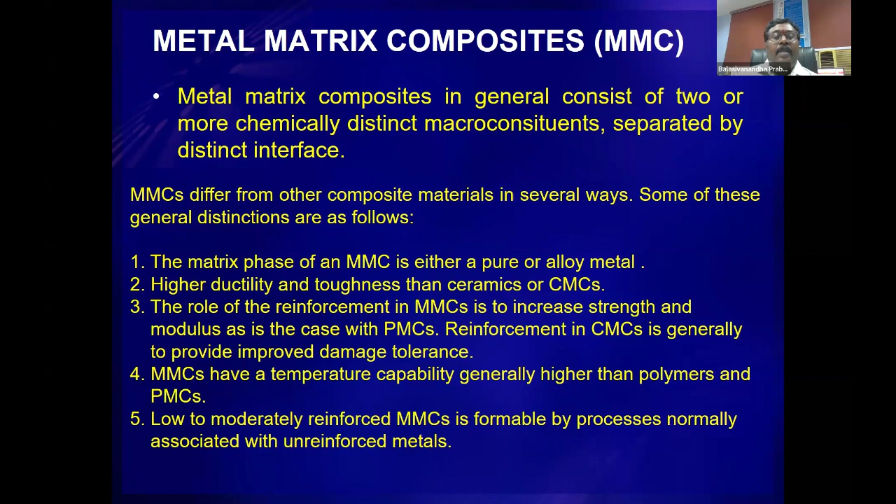Low to moderately reinforced MMCs are formable via processes normally associated with unreinforced metal, meaning all the conventional methodology used to process metal can also be adopted to manufacture or process metal matrix composites. As a result, the technologies are not new - it is only modifications of conventional technology that we employ, with some little changes needed to manufacture or process composites.

These are some basic things: metal matrix composites can be classified into dispersion strengthened, particulate strengthened, and fiber reinforced. The fiber reinforced would be similar to polymer matrix composites, where we have a lot of opportunity with respect to particle reinforced composites and dispersion strengthened composites. These are all distinguished only with respect to the particle dimension.

If the particle dimension is more than 1 micron, we call that particle reinforced. And if the particle dimension is less than 1 micron, we call that a dispersion strengthened MMC.

So the principle is very simple. In fiber reinforced composites, the fibers take up the strength, so that is the major load carrying member, and as a result the strengthening mechanism is the fiber strengthening mechanism. But in particle reinforced and dispersion strengthened composites, the particles act as a hindering element to dislocation movement, and as a result you get a good degree of improvement.

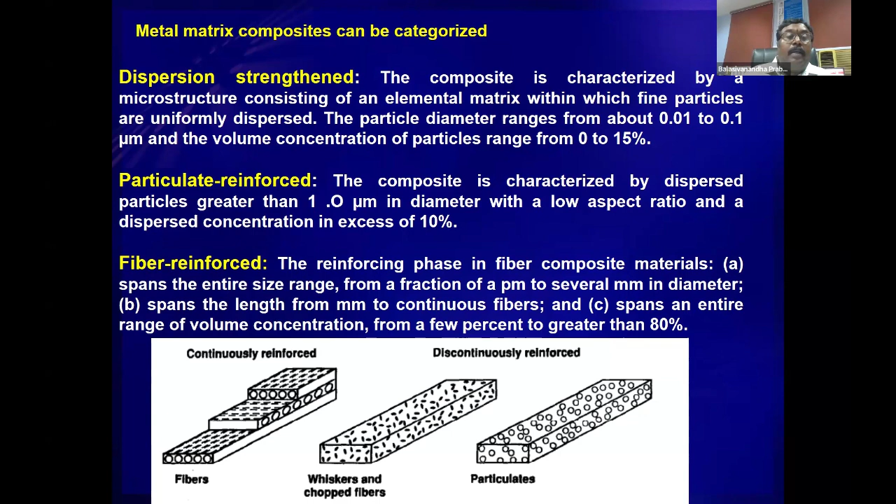So in general, we have aluminum, magnesium, titanium, copper alloys, and super alloys, and the majority of these metal matrix composites were already tried with aluminum and magnesium.

And we take this reinforcement, mostly silicon carbide, graphite, or alumina, in the form of a particle, fiber, or whisker.

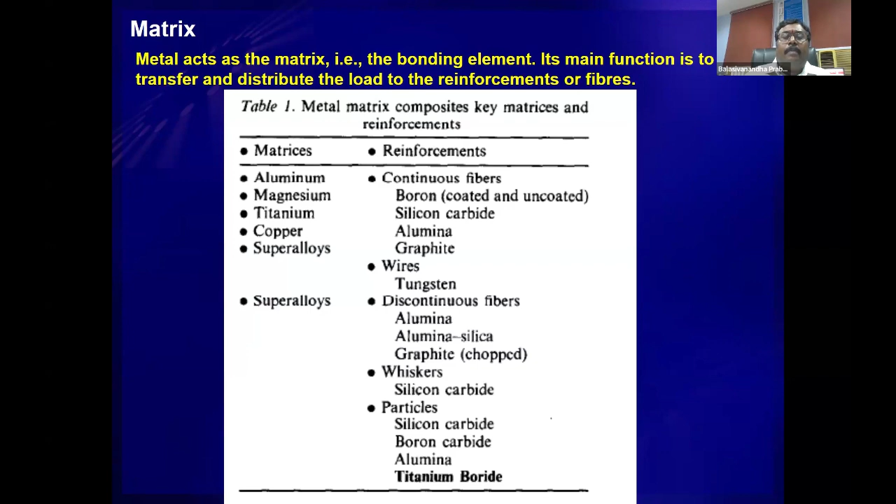Coming to the processing technology, if you want mass production, we depend on two technologies: solid state processing and liquid state processing. In vapor state processing, somehow you can make a batch production, and for high-end applications we still fabricate some MMCs with vapor state processing.

Solid state processing technique is also possible with the mass production concept, but because of size limitation and some inherent problems associated with this composite technology, it has not been fully used for commercializing metal matrix composites. But in the research field, we use solid state processing to demonstrate some mechanical properties of metal matrix composites.

So from an industrial perspective, liquid state processing would be the convenient method for mass production technology of metal matrix composites. Here we have three different stages: pre-processing, primary processing, and secondary processing.

This liquid state processing technology is especially useful for particle, short fiber, or chopped fiber, or probably for continuous fiber also in the case of preform preparation. The major technologies associated with liquid state processing are stir casting, infiltration, and spray casting technology.

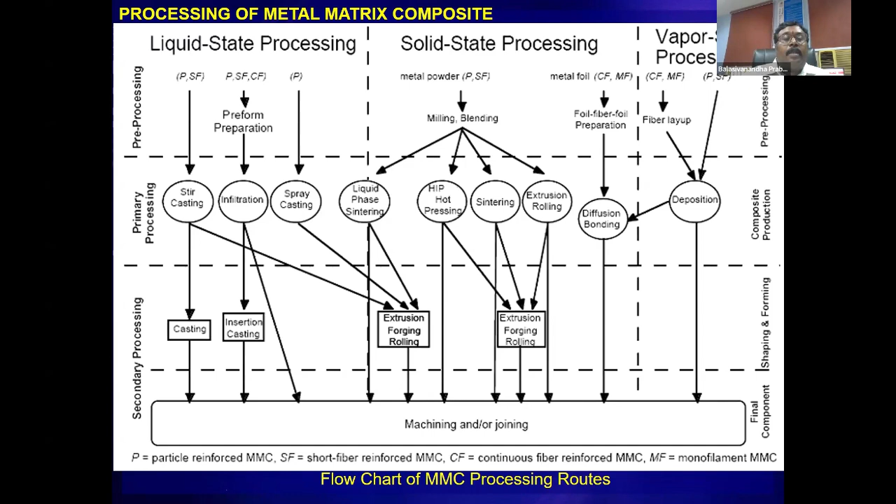Now what I am going to talk about is only liquid state processing, because that is the technology where, if you overcome its barriers, there is a possibility of mass production. So industry can think about making good composites in mass production and then use them for different applications.

So in stir casting with liquid state processing, we can have a metal yield of 90%, and the range of volume fraction of reinforcement addition is 0.3, that means 30% of reinforcement in terms of volume can be added. Also, no damage occurs to the reinforcement, and it is least expensive.

Associated technologies of liquid state processing include squeeze casting. In squeeze casting, we can go up to 45% volume fraction, that is 0.45 in fraction, 45 in percentage. But sometimes there are damages to the fiber or particle because pressure is applied, and it is moderately expensive. Powder metallurgy, compared to liquid metallurgy, is highly expensive.

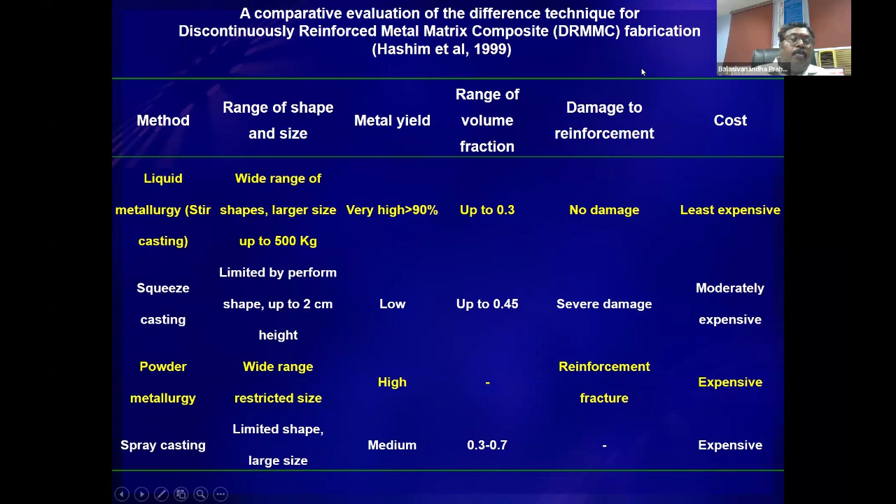So for commercial production and for mass production, it would be possible to take up the stir casting technology.

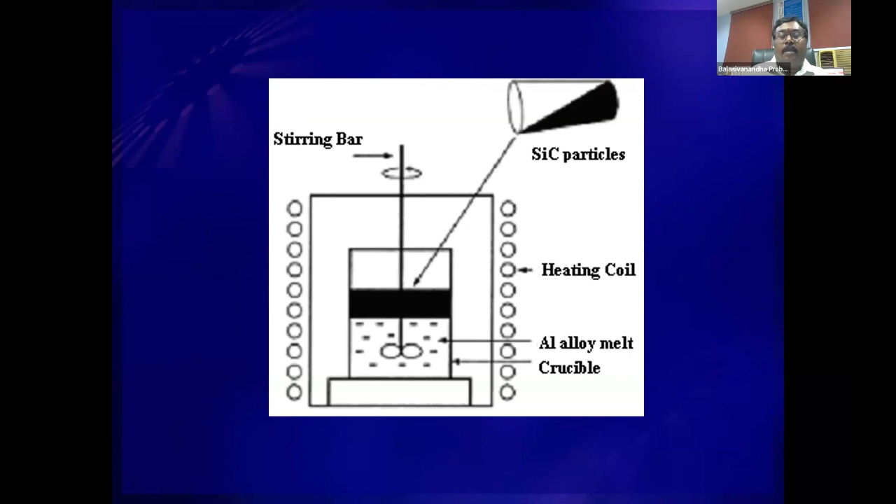The technology is very simple. You heat the metal to make it a liquid and superheat it, then add the reinforcement particles, whatever they may be—silicon carbide, alumina, or any other particle. You stir it mechanically or ultrasonically, creating turbulence so the particles homogeneously mix and distribute uniformly. Once distributed, you deposit it by conventional casting solidification. These are some microstructures we have cast in our laboratory.

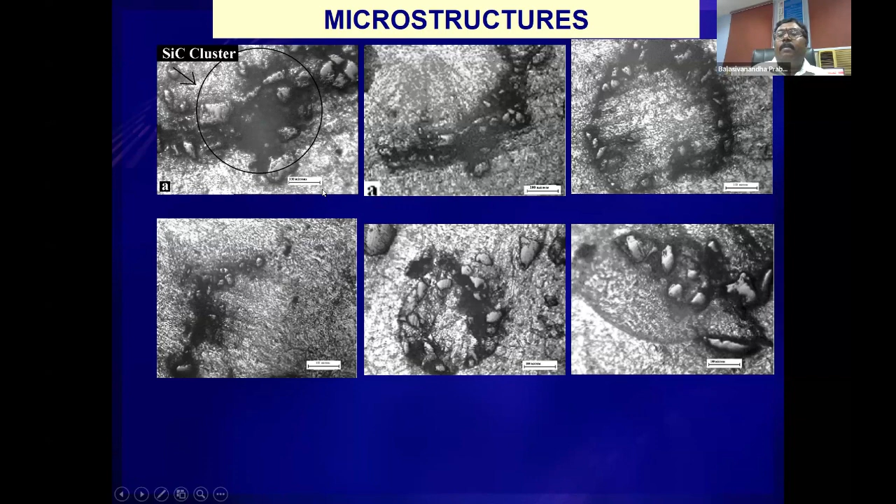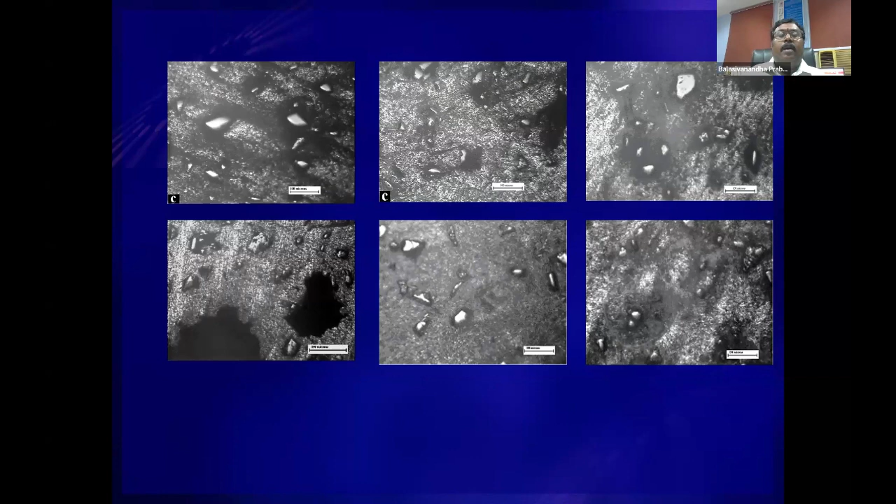When there are so much agglomerations, one thing noticed is a lot of porosity associated with the agglomerated structure. This happens because the melt is not allowed to go inside the agglomerated structure—it acts as a barrier, stopping the melt. As a result, porosities form associated with the particle clusters. But when there is uniform, homogeneous distribution, you can minimize the porosity and expect good mechanical properties from this processing condition.

Even though this technology offers mass production possibilities, there are challenges. The foremost challenge is the difficulty of achieving a uniform distribution of reinforcement material. Once you achieve homogeneous distribution, you can work on improving the properties of this material.

Another issue is wettability, because you are trying to bind a metallic material with a ceramic material, and wetting becomes a problem. Another case is chemical reaction, since most liquid state metallurgy processes take a minimum of 30 minutes to an hour. This means continuous contact of the reinforcement with the melt at high temperature, which slowly develops reactions between the matrix and reinforcement material. This generates a chemical reaction product at the interface, sometimes giving an undesirable byproduct that stops bonding between matrix and reinforcement, so we cannot get composites with good mechanical properties and reliability.

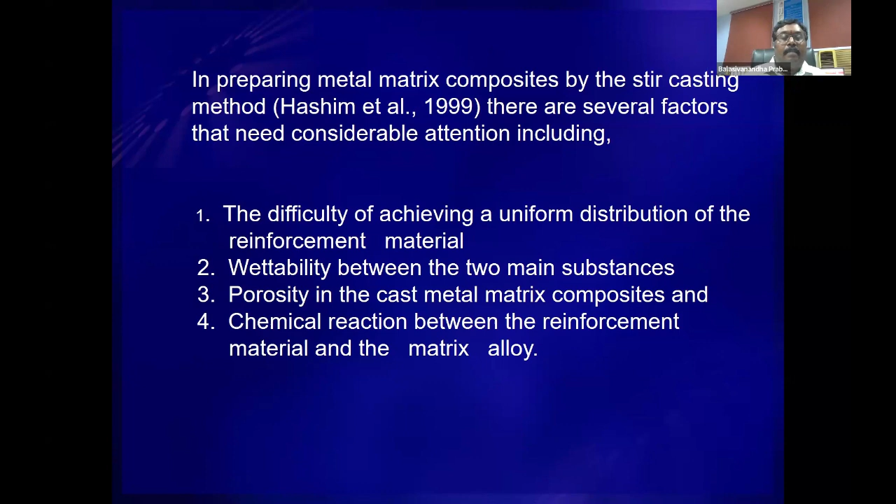Porosity can be eliminated—that is not at all a problem in mass production, since we have techniques to control it. But the main challenges in metal matrix composite production are three: difficulty achieving uniform distribution of reinforcement, porosity, and chemical reaction, along with wettability.

Take uniform distribution, for example—it's controlled by viscosity. The relationship between viscosity and temperature is inversely proportional: when the melt temperature is high, viscosity is lower. So when the melt is kept exactly at the melting temperature and reinforcement is added, the reinforcement absorbs heat, drastically reducing the melt temperature, which makes viscosity very high.

Because the medium is highly viscous, it won't allow particles to penetrate, resulting in more agglomerations. If you conveniently set the temperature parameter a little higher, you get lower viscosity, sufficient for particles to penetrate while turbulence is created, allowing them to distribute uniformly. So one controlling parameter in this process is temperature, which may play a major role in controlling particle distribution.

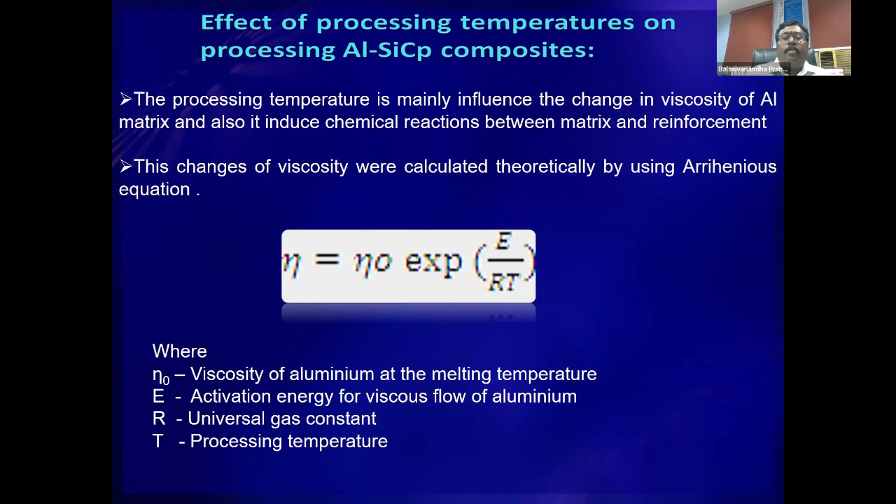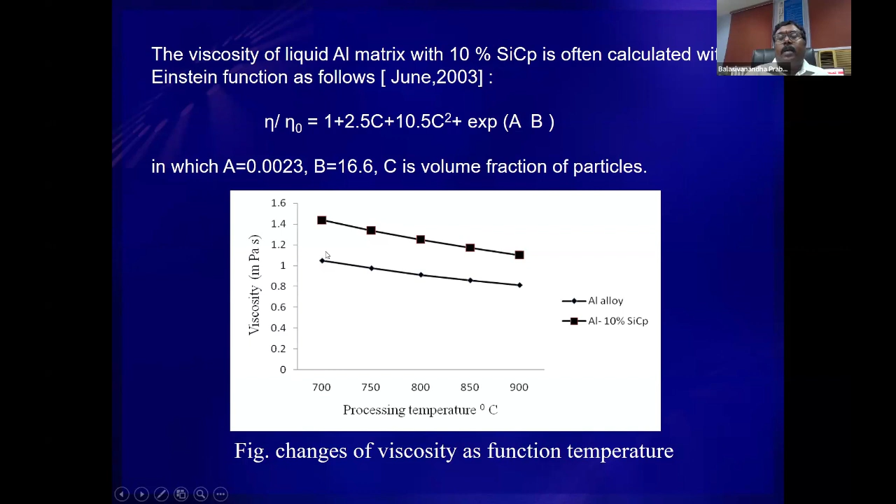We calculated data showing that for the aluminum alloy, viscosity drastically reduces from the melt temperature up to 900 degrees. But when I add 10% silicon carbide particles, the viscosity becomes even higher—a highly viscous medium, making distribution very challenging. At around 900 degrees centigrade, I would get viscosity similar to the pure metal, allowing dispersion of the particles. Here I present three cases: one with melting temperature 650, preheated to 700 degrees centigrade, where particles are stirred and cast.

Finally, at 700 degrees centigrade, we end up with a more agglomerated structure, so silicon carbide particles appear agglomerated. When I increase the temperature to 800 degrees, the agglomeration was broken and you can see a good homogeneous distribution of particles. Again, when increased to 900 degrees centigrade, further agglomeration starts. So that means, only by increasing the temperature, one cannot achieve good homogeneity because something else is happening there.

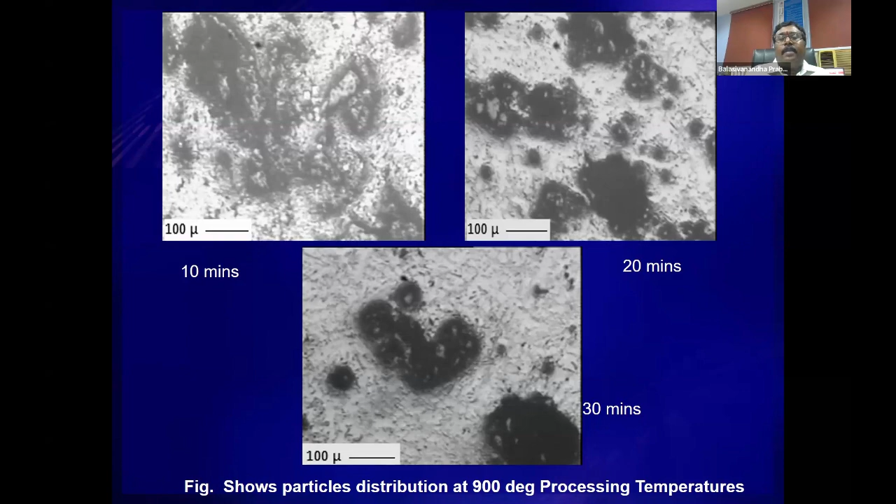You have to have sufficient viscosity to allow the reinforcement to penetrate and then uniformly distribute. But even if you have too low a viscosity, that allows the particle to settle down very quickly the moment you stop the process, before casting. So that also causes more particle agglomeration. Therefore, extreme lower temperature is also not favorable, and high temperature is also not favorable, to have a homogeneous distribution of particles.

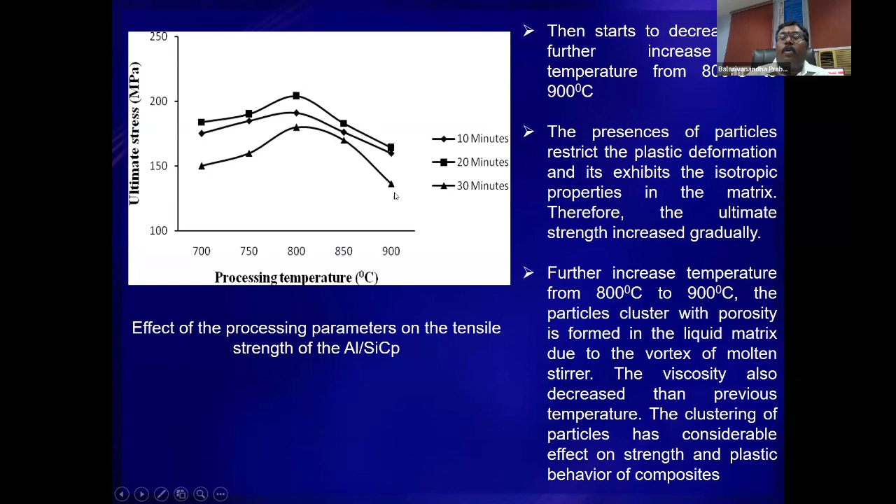When you have 800 degrees, you have a homogeneous distribution. As a result, you get good mechanical strength compared to the 700 degree processed condition. But in both the 700 and 900 degree conditions, the strength is declining. That means one has to optimize the temperature to get homogeneous distribution. So that's the temperature effect we have studied.

Another important thing is the wettability between the main substances, which is the ability of a liquid to spread on a solid surface. One can increase the wettability by increasing the surface energy of the solid, meaning the reinforcement, and decreasing the surface tension of the liquid, meaning the matrix metal. Decreasing the surface tension of the matrix metal liquid is possible by increasing the temperature.

So the viscosity will come down. And increasing the surface energy of the solid is done by heating the solid, preheating the solid. This combination will decrease the solid-liquid interfacial energy at the particle-matrix interface.

The wettability can be decided with the wetting angle. You have a surface tension vector of solid-liquid and a surface tension vector of liquid-vapor, and the angle between them. If this angle is 0 or close to 0, we call it perfect wetting.

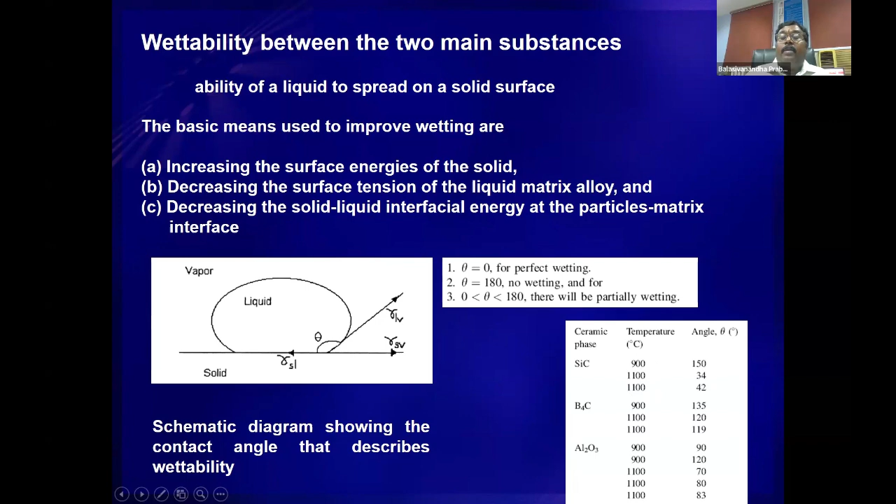Preheating the ceramic particle to 1100 degrees centigrade gives an angle of 42 degrees compared to 900 degrees where you have an angle of 150. Therefore, preheating the particle before adding it into the melt helps to improve the wettability.

Also, agglomeration is not only happening because of the settlement of particles due to lower viscosity. Redistribution is also possible because during solidification, as the metal tries to solidify, you generate some kinetic energy at the solidification front that pushes the particles ahead of the solidification front.

As a result, some agglomeration is possible. So if you control that driving force by applying a compressive force, then the homogeneous distribution achieved in the melt would be preserved in the solid after casting also. Therefore, squeeze casting would be another secondary operation. Once the stirring is over, you can transfer the melt to the process where you do squeeze casting, which also gives good microstructure that helps improve mechanical properties.

So these are all the process parameters we have studied: varying the melt temperature from 750, 800, to 900, keeping the die temperature in different situations from 250 to 400 degrees centigrade, and also changing the pressure from 30 MPa to 130 MPa, and observing how the microstructure changes.

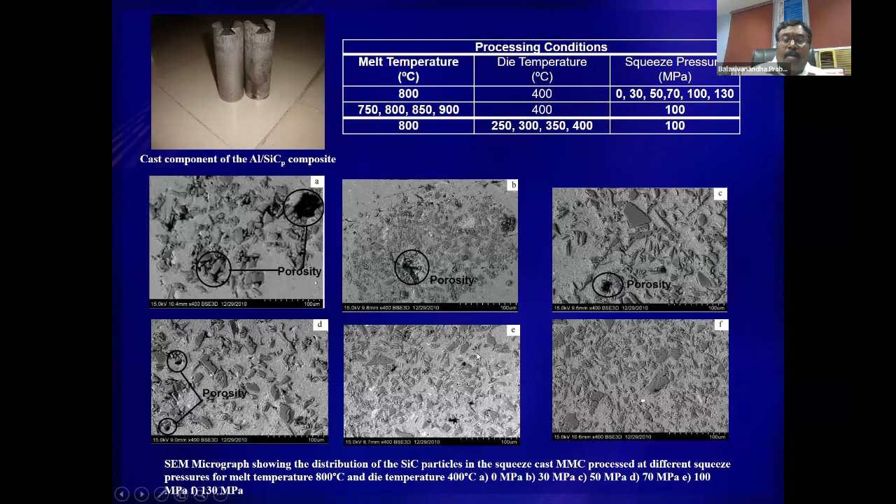Once it is solidifying, it's not trying to move out. So if you look at this pressure range of 70 to 130, you could get some homogeneous distribution. As a result, we can also expect some grain size reduction, because we are creating a situation where the mode of heat transfer is conduction mode, giving faster solidification.

As a result, the matrix now has grain dimensions in a finer domain. In conventional casting, grain size ranges from 10 micron to 40 micron, but in squeeze casting, it can range from 2 micron to 14 micron. There is also a greater improvement in strength possible, with ultimate strength going from around 70 MPa to 250 MPa.

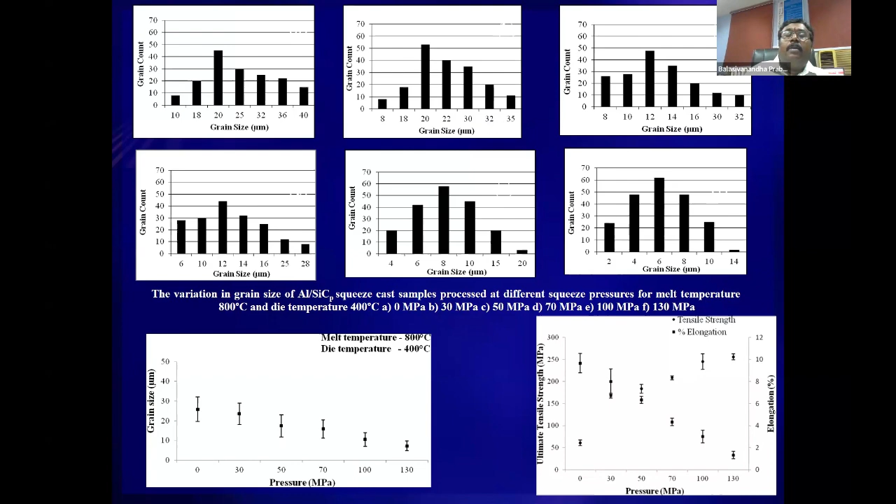Another important thing is that ductility will reduce. That's another challenge, but the mechanical property, especially tensile strength, keeps increasing with this processing condition. So if you couple squeeze casting along with stir casting, you can get good mechanical properties and also good microstructure.

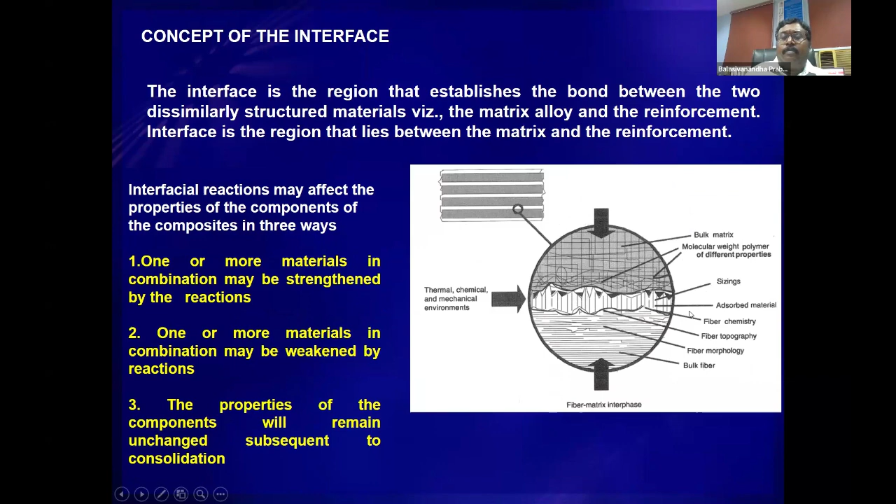The interface is another problem, because chemical reaction will induce some kind of different phase formation at the junction boundary of both matrix and reinforcement. The possible reactions here, especially when you have a different material system, most probably take aluminum as the matrix material and silicon carbide, boron, or carbon as the reinforcement.

In these cases, especially aluminum silicon carbide, we get a different product called Al4C3. It's a compound formed at the junction, a precipitate around the boundaries of the particle that stops the connection between matrix and reinforcement, and sometimes weakens the bonding at this junction. So for every case, you have some byproduct which stops the bonding between matrix and reinforcement, and sometimes weakens the interfacial bonding because of the nature of the phases formed.

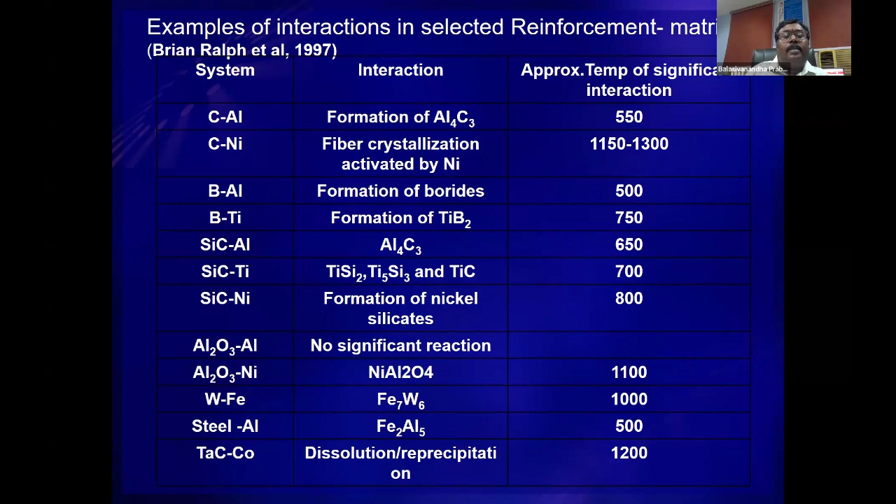We have also extensively studied this Al4C3 formation, which is formed by aluminum and silicon carbide. Silicon carbide separates into Si and C, then C reacts with the Al to form Al4C3, and silicon is left over, going into the nearby matrix material and modifying the chemical composition of the aluminum alloy. This separation takes place only at the surface of the silicon carbide.

Al4C3 degrades the mechanical property as well as physical properties. If you try to control this formation during processing, sometimes in a humid condition, an acidic condition, or an elevated temperature condition, it tries to form Al4C3. So you cannot avoid this. Somehow or other, this byproduct will be formed, either during the processing condition or during the service condition.

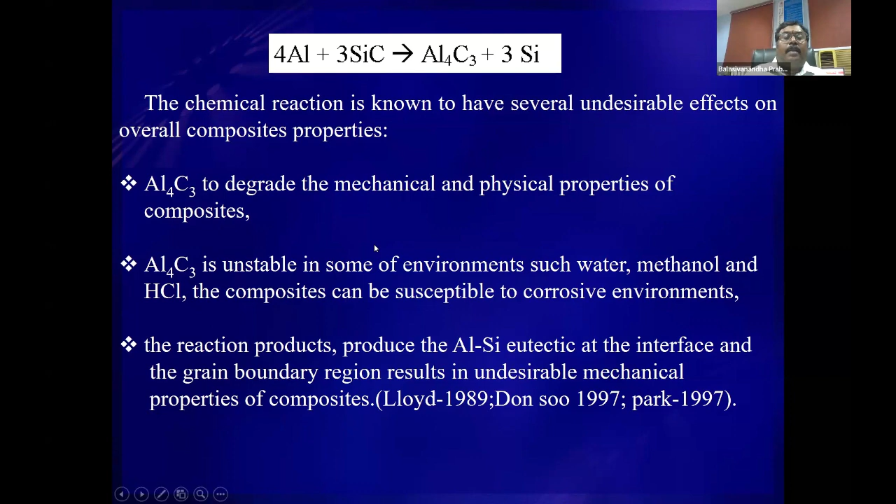One way to stop this degradation or Al4C3 formation is to coat the particle. We have also studied what effect this does on mechanical property, whether it creates good bonding or a kind of worst bonding. We took a silicon carbide plate and tried to create a bonding at different temperatures, and studied the macroscopic layer where Al4C3 is formed.

With detailed analysis using EDS and mechanical property testing, subjecting it to tensile conditions, we studied the mechanical strength and the bonding, which was very poor. It can be easily separated with a minimum load. Also, Al4C3 formation increases with respect to temperature; when the working or melt temperature is higher, more Al4C3 forms, weakening the composite system.

This formation has also been experimentally demonstrated and confirmed with XRD analysis, where Al4C3 forms at the junction, at the macroscopic junction.

We have also computed the diffusion length, so what length this will penetrate - this Al4C3 - and it would form up to a 0.016 micron layer thickness. That means it's a very fine precipitate, but the effect would be very, very adverse.

With increasing working temperature or melt temperature, the amount or length of diffusion is also higher. That means you're able to form good thickness layers of precipitate which cover the particle, and as a result, the bonding is stopped - permanent bonding is stopped.

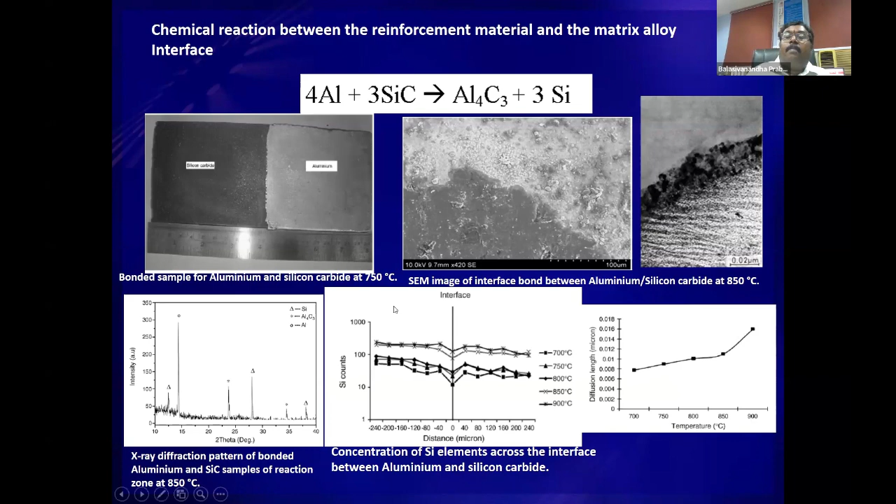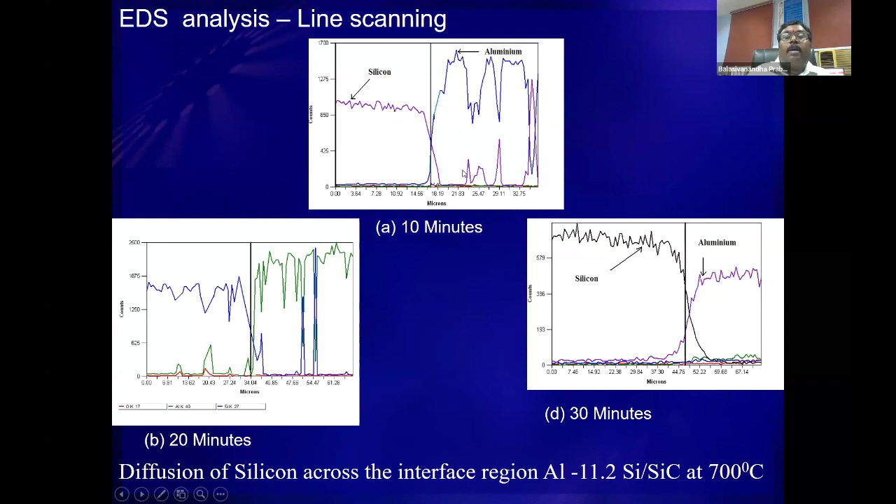So these are some macroscopic images showing how it establishes the bonding. We have also done EDS analysis to understand how the free silicon modifies the composition of the material, which we have studied.

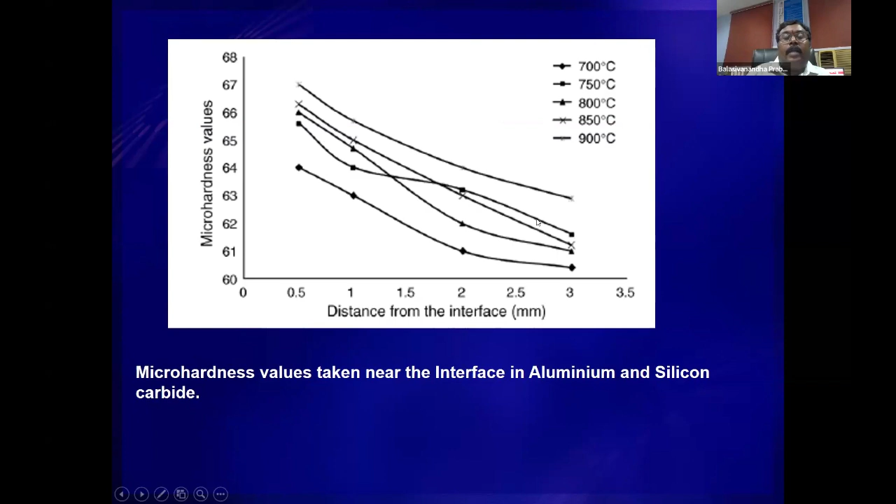Finally, we can also study the interface formation with micro-hardness examinations. From the interface to away from the interface, we can establish a correlation where Al4C3 formation tries to create more hardness at the interface. Away from that, it decreases, meaning it's the hardness of the original material.

So these ex-situ reactions have problems with homogeneous distribution and interface bonding mechanisms, which can be eliminated by developing the same reinforcements through in-situ reactions. Especially in in-situ reactions, you have gas-liquid reaction and liquid-solid reaction, and one reaction we have demonstrated is liquid-solid reaction.

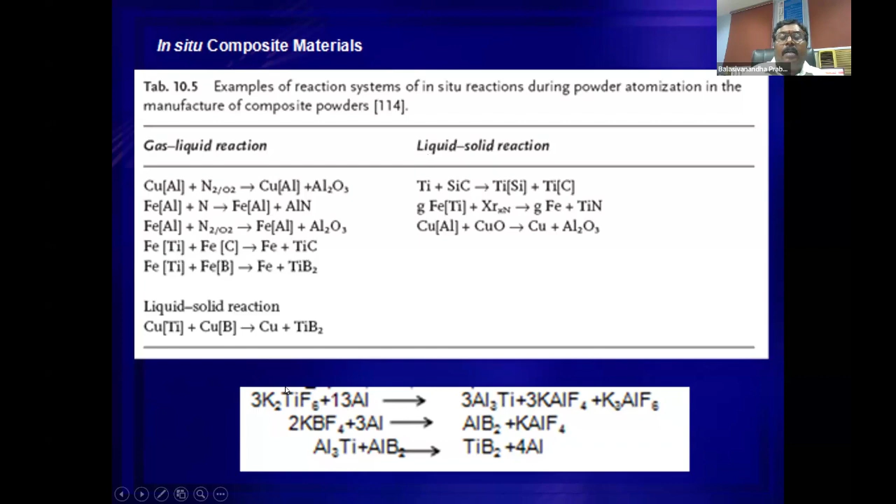We take precursor salts of K2TiF6 and KBF4, with aluminum as the matrix material, and these reactions produce TiB2 ceramic particles into it. This is the procedure.

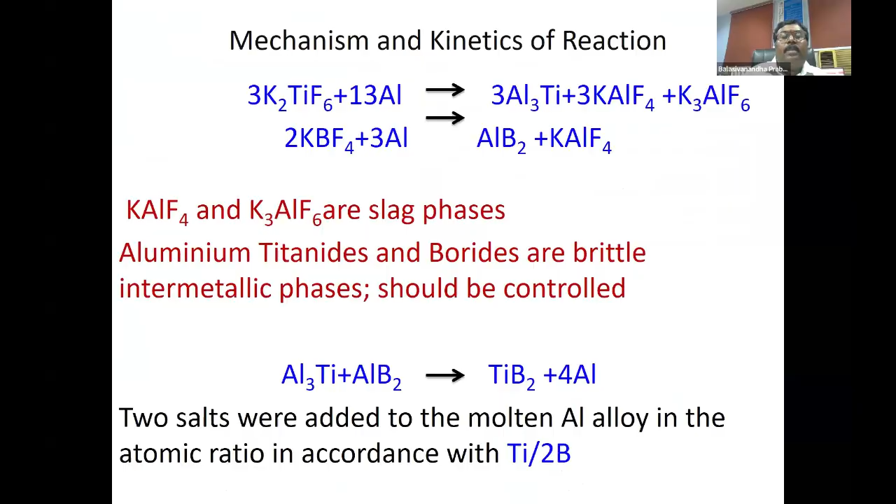I will skip that and demonstrate the real thing behind these in-situ reactions with microstructure examinations. After developing these reactions inside the melt, one could see that at any temperature, whether 700 degrees centigrade or higher, I was able to get a homogeneous distribution of reinforcement because the particles evolved inside the liquid melt.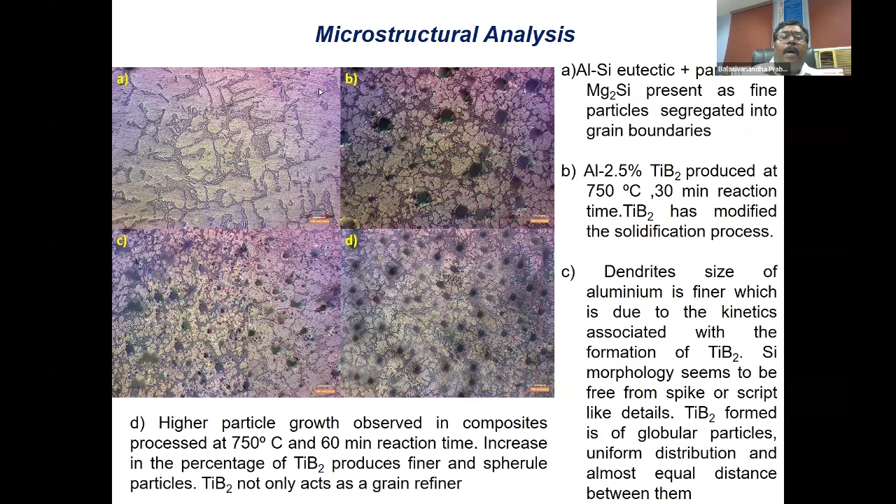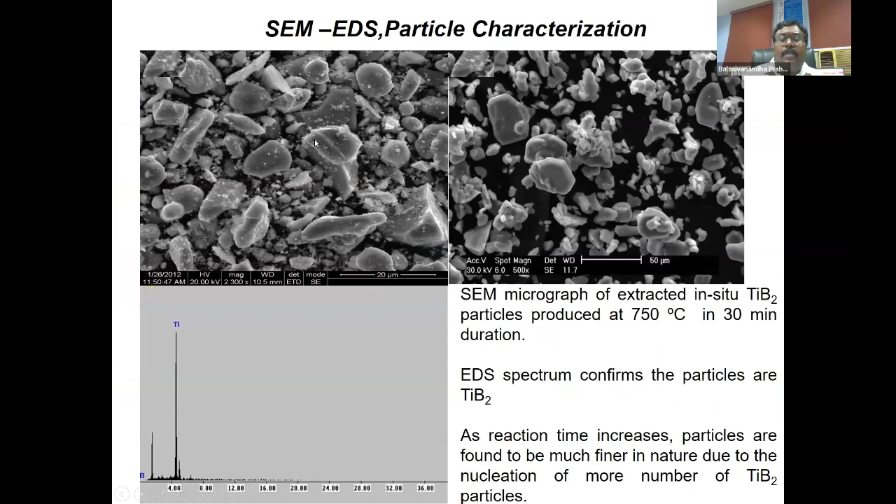So there is homogeneity in getting the particles, and the particles also have uniform dimensions. These are all separated particles - examining them, you see some spherical shapes and different shape formations. With this, we could say that there's a homogeneous distribution.

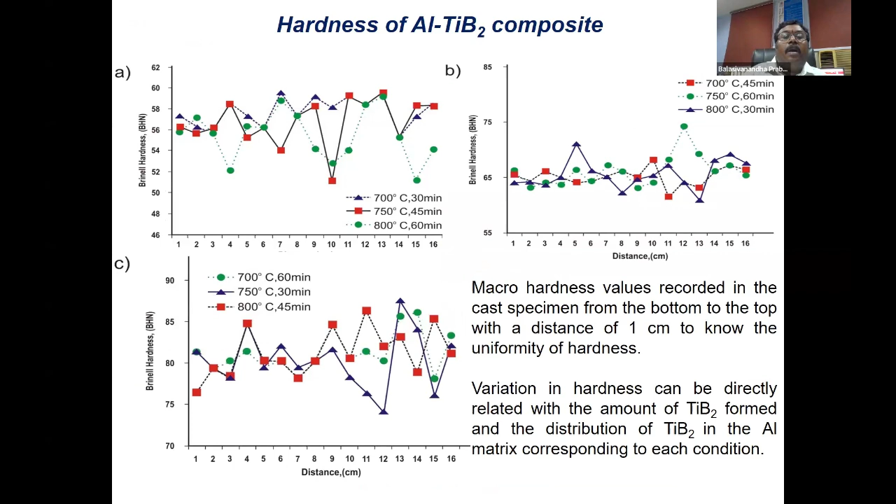This can be demonstrated by measuring hardness along the length direction and across the direction. Because the distribution is homogeneous, the hardness value measured on the surface anywhere shows a homogeneous hardness value, and there's a greater improvement in mechanical properties.

One more interesting thing is that we could not notice any interface formation, because the reaction itself gives the particle and further reaction may not occur. So the particle directly creates contact with the matrix, resulting in good bonding also.

So the greater improvement from the original strength of 115 megapascals to 202 megapascals was the greater achievement in strength that is possible. One can also imagine this can be extended to mass production, but there are some challenges.

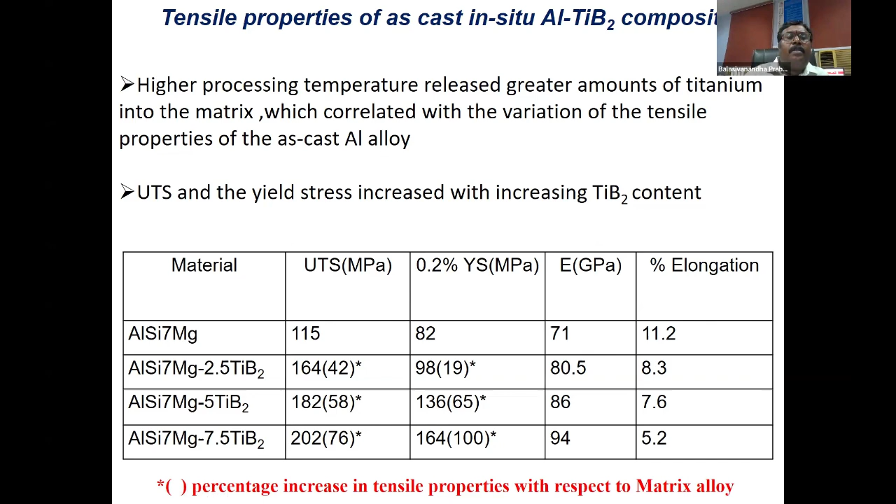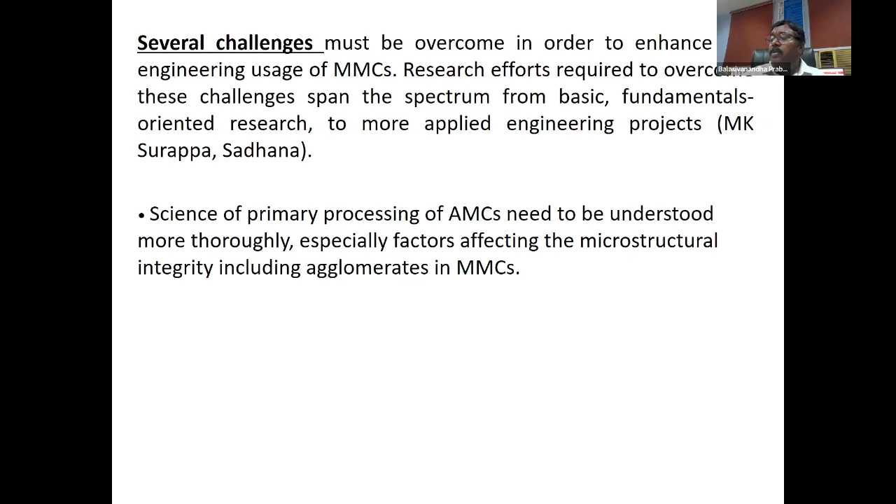So the science of primary processing of MMC needs to be understood more thoroughly, especially factors affecting the microstructural integrity, including agglomerations in MMC. That is one of the challenges.

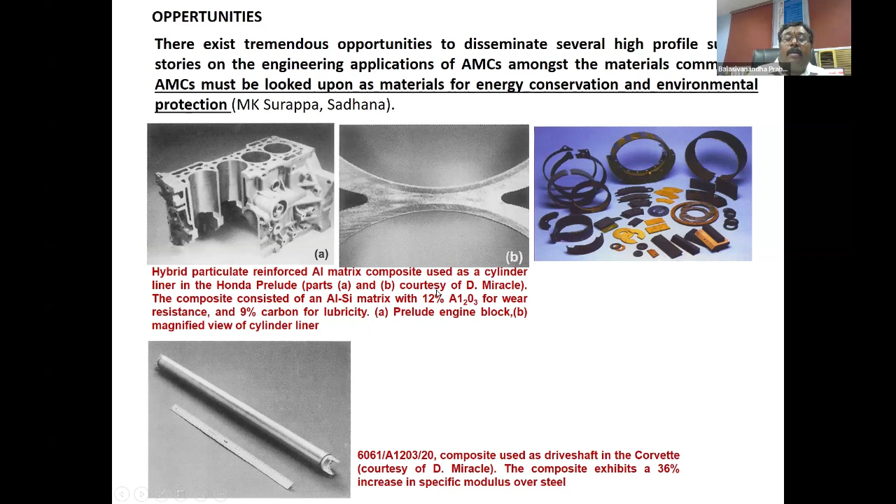But if these challenges are overcome, then we have a good opportunity to make several components out of this MMC - especially brake parts, brake liners, and aluminum matrix composite cylinder liners. We also have drive shafts that can be made from aluminum carbon-based composites, and not only cylinder running surfaces but also brake liners and pistons - many good applications with this wonderful material.

But so far, the real potential of this metal matrix composite has not been fully exploited. In some cases, people are using these metal matrix composites with specific processing, but for commercial production, there are still barriers that have to be overcome.

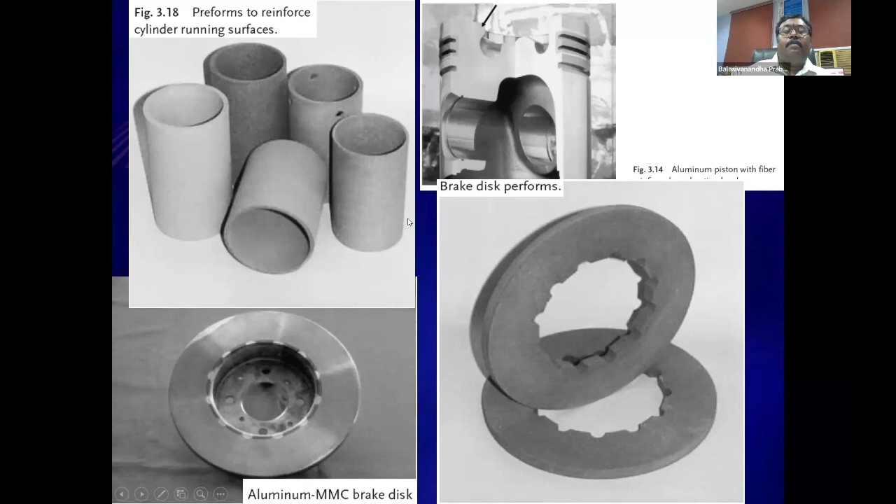So I think with this brief overview of my research background, I'll conclude, and then probably I can take up two to three questions from the participants. Thank you very much.